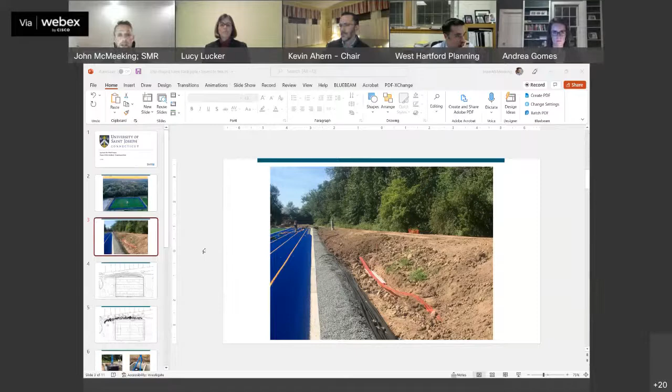In an effort to respect the surrounding natural wetland ecosystems, the university installed a StormTech filter vault system between the south side of the field and the edge of the existing woodlands to the south. The vault treats any stormwater that does not infiltrate vertically. Synthetic turf fields drain incredibly quickly, with most drainage going vertically down and very little horizontal drainage. This vault picks up any infiltration that doesn't make it through the turf, collected via pipes on either side of the field into this vault system.

Inside the vault is where it gets cool - it's filled with a series of canisters containing proprietary media targeted for specific pollutants of concern. You can pick what pollutants you're trying to target, and these canisters are filled with whatever media targets those pollutants. For this project, it was zinc and phosphorus we were looking at. The vault fills with water, which is sucked to the middle of the canister, goes through the media, and then drains through a center tube to an under-drain system, exiting the vault with pretty much clean water.

From there, the stormwater daylights into the existing wet meadow to the south of the field. If it ever reaches a certain elevation, it then drains into an overflow structure piped into the existing campus stormwater system. So there's really very little stormwater which isn't controlled as far as this field is concerned. We've got multiple layers of protection to make sure the stormwater is being handled, and most importantly, being treated properly.

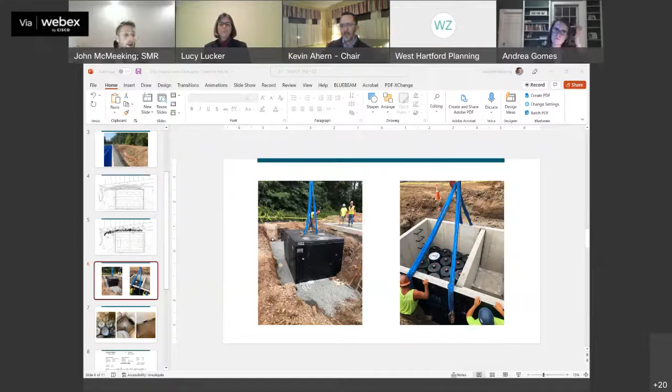At this point, we'd like to review the conditions of approval that required action by the university.

Condition number two: the stormwater filter vault shall be maintained in accordance with the manufacturer's specifications, and a cleaning and monitoring report shall be filed with the town once a year. The vault was inspected and cleaned in July of 2021 by a company called Savvy & Sons, located in Amston, Connecticut. The report is included with your package of supplemental documents. The inspection showed the vault to be clean and working as designed.

I do have a photo here, and I believe it's in your packet. You can see this is about as clean as vaults go. So again, the inspection showed it to be clean and working as designed.

Condition number three: water quality testing, including for the presence of zinc, for water exiting the stormwater filter vault, shall be done annually and submitted to the town. Water samples were collected in August 2021, again by Savvy & Sons, and sent by proper chain of custody to Phoenix Environmental Laboratories in Manchester, Connecticut. Samples were collected from the vault floor and also from the outlet pipe, so we could compare and contrast the two samples.

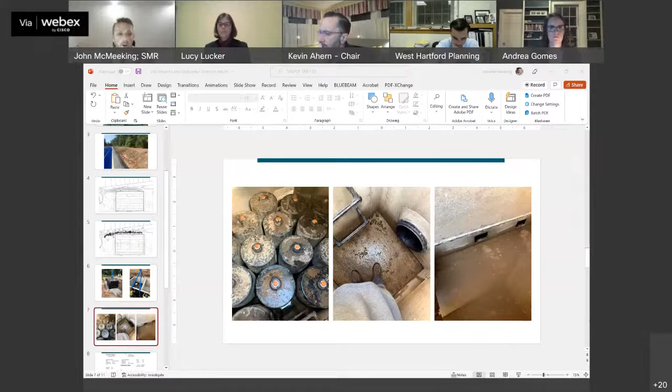As I mentioned earlier, the proprietary media within those canisters is targeted to treat zinc and phosphorus. So if we can, I'll jump here to some of this lab data and take a quick look.

Just so we're all on the same page, the EPA limit for zinc in drinking water is 5 milligrams per liter. Our test results show 0.06 milligrams per liter in the sample collected directly from the pipe, and 0.025 milligrams per liter in the sample collected from the floor of the filter itself. Given those numbers, this water is virtually free of any zinc, and depending on who you talk to, you could drink this water. It's clean.

The EPA limit for phosphorus in drinking water is 0.05 milligrams per liter. Our test results show 0.042 milligrams per liter in the pipe and 0.041 milligrams per liter in the floor of the vault. Again, this water is virtually free of any phosphorus, and it's clean. This filter vault system is doing its job very, very nicely.

As part of our discussions with the town planner in preparation for this evening, Mr. Dumais recommended that the university provide additional information on the test results for mercury. There was some language in this report referring to a percentage of mercury that was out of the acceptance range. This result was actually not from the university's water sample.

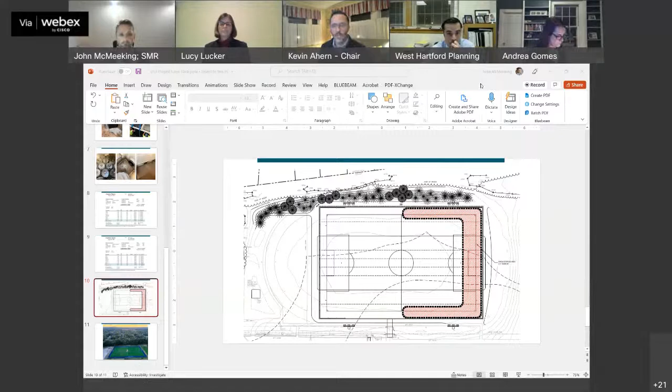This is Kevin Ahern, Chair again. Do we have questions for the applicant? I had a quick question, I'm sorry, I can't actually see Ms. Gillette on my screen, so if she has questions. I also want to note for the record that Josh Kaplan has joined us via telephone. Josh, I believe you're unmuted, so at any time if you have questions, just jump in. Ms. Gillette, did you have your hand raised?

I was just curious about the community outreach, but I'm not sure this presenter was in charge of that. I can certainly speak a little bit to that. There's been extensive outreach as we went through not only the design phase of the project, but also here in this look back phase. We actually met last week, and I think Vice President Lucker can touch a little more on this, as it's an operational component.

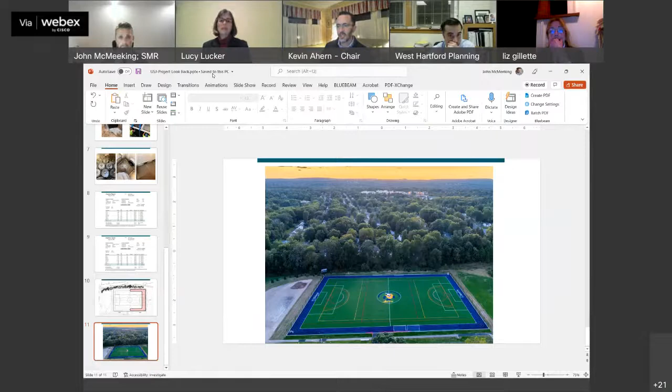Thank you, Vice President Lucker. This is Vice President Lucker. We sent out letters to all of the abutting neighbors inviting them to a meeting last Monday. We had one neighbor attend so we could answer their questions and concerns. The university is always open to feedback and wants to hear from our neighbors. We are committed to meeting all of the conditions and continuing to do so, and to try to respond to neighborhood concerns as they arise.

Ms. Gillette asked what the one neighbor who attended had to say, and whether there had been any other feedback in the year or so the field has been in use, noting that the university has been diligent in wanting to have a response. The chair noted the question was a little spotty but they got the gist of it, and asked the Vice President to take a crack at it.

Yes, thank you, this again is Vice President Lucker. The neighbor who attended acknowledged there was no spillover of light into their yard, but did want us to understand that the field is very lit, and when they look at the field, it's very light, which is a true statement. They were also concerned that sometimes there is some noise on Saturday that was a little more than they expected, but they said it wasn't a major concern.

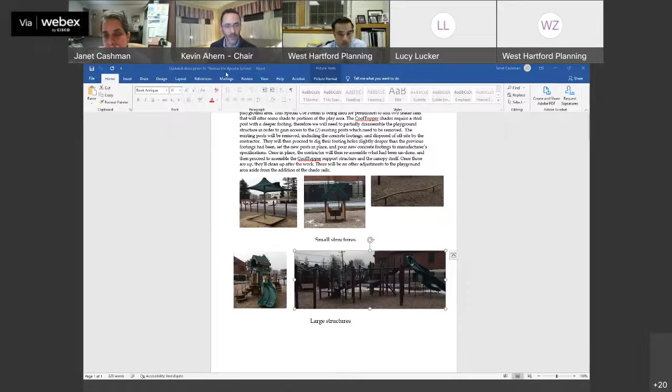Thank you, Ms. Cashman. I just wanted to clarify, you're all finished? I think so, yes. Okay, all right, so do we have any questions for Ms. Cashman?

Well, I'm sorry, excuse me, Janet Cashman again. I did get a notice later in the day today about a neighbor that had some questions and concerns about weather-related problems with this type of system. I did reach out to both the contractor and the playground company to find answers to those questions.

The neighbor's concern had to do with: since the trees had fallen, why wouldn't we be nervous that any of these things we're putting up could also be dangerous, as far as the windstorms we've been seeing and the snow. The company is M.E. O'Brien and Sons.

The consultant told us that the CoolToppers are designed to withstand 90 mile per hour wind speeds and 5 PSF snow loads per International Building Code. He said that they're installed quite deep into the ground and integrated into the structure, so they're not going anywhere. He said the hardware is stainless steel and comes with thread lock, and that they would need power tools to remove the hardware, and that no wind speeds would be able to loosen it.

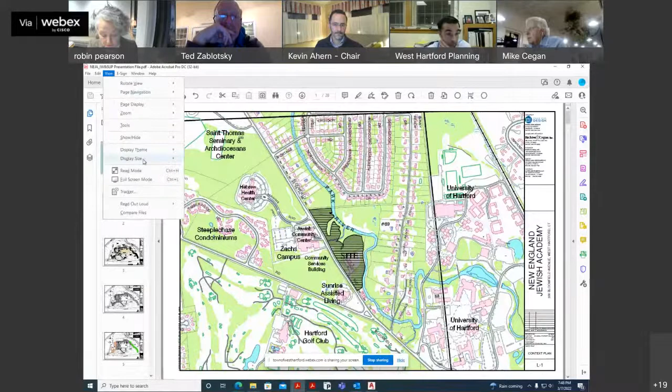The Jewish Academy's 11.9 acre site is located at 300 Bloomfield Avenue. This context map shows the surrounding neighborhood context. Along Bloomfield Avenue are other institutional uses, including Sunrise Assisted Living and the Zachs campus, which includes both a community center and a health center. The surrounding residential neighborhoods are to the north, south, and east of the parcel and are buffered by a heavily wooded area and the Park River between the school and many of the residences.

I've been fortunate over the years to be involved with the project. I'm very familiar with both the site and surrounding neighborhood, having worked on the 2009 design and town approvals, including what I think was a successful community outreach process that included both neighborhood and community meetings. That neighborhood outreach has continued through this current application and has resulted in the addition of extensive buffer plantings, which I'll go through in more detail later.

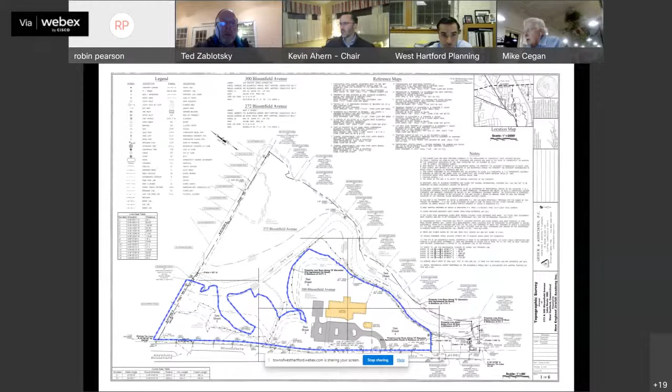This is the survey of the property, simply from 30,000 feet, showing the existing school parking and site improvements that were constructed in 2010. Most of the construction on the site is in that southern portion, or right side. North is diagonally to the left, roughly to the left on all the drawings you're going to be seeing. That southern portion is really what we're going to focus on in the next slide, and you'll see the development is as close up to Bloomfield Avenue as can be.

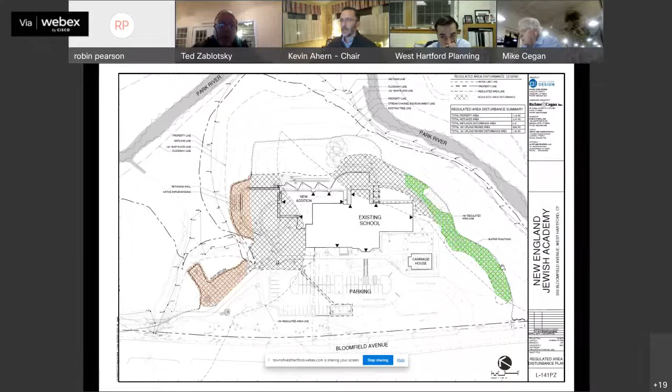First, the landscaping around the new addition, play area, and outdoor classrooms, which consists of additional trees, shrubs, and ground cover. The second component is the native plantings and native seed mixes on the slope and along the woods edge.

This is north of the play area and in and around the new stormwater basin and along the woods edge in this area as well. The third area of landscape planting is the extensive buffer plantings that were added along the woods edge south of the existing building, extending almost to Bloomfield Avenue. These were a result of the neighborhood outreach effort.

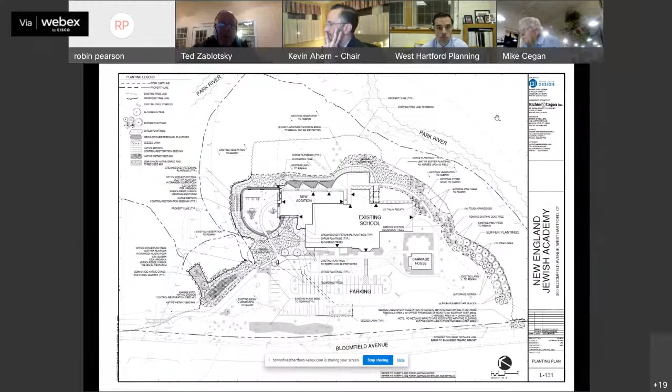Our neighborhood outreach effort involved notifying the property owners within a 200-foot radius. The effort included sending a packet of information describing the proposed changes and an invitation to a virtual meeting to discuss the proposed changes.

As a result of that meeting, there was only concern expressed by a few neighbors along the north side of Sunny Reach, where their backyards actually face directly into the site through the woods towards the building's south elevation. We met each one of these neighbors in their backyards to see their views into the site and document and photograph the conditions there.

Based on these site visits and our discussion with the neighbors, we prepared a detailed plan and reviewed the plantings with the neighbors in a follow-up virtual meeting. We also had some miscellaneous additional correspondence with the neighbors, answering their questions.

As it turns out, the concerns relate not to the proposed addition as part of this application, which we intentionally located to the north side of the building and away from the Sunny Reach neighborhood, but to the impact of the construction of the school back in 2010. Regardless of what the concerns related to, the Academy wanted to respond and be good neighbors, and so we have.

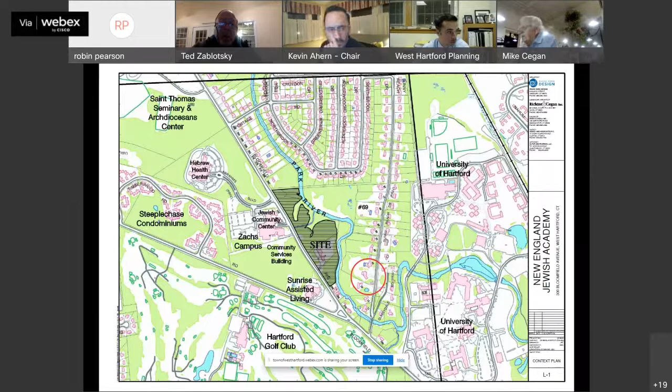Next, please. So after meeting on each of the properties and then back at the school site, it was agreed to locate the buffer plantings along this woods edge at the south of the school, extending almost to Bloomfield Avenue. This would screen the views of the south side of the building facing the homes closest on Sunny Reach, as well as screening the traffic they have glimpses of along Bloomfield Avenue.

You'll see the location of the new addition was again intentionally placed to the north side of the existing building shown here, away from that Sunny Reach neighborhood, which are our closest neighbors.

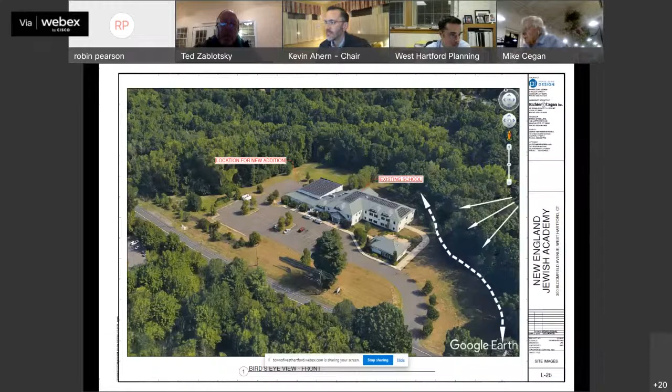Next, please. This enlargement of the proposed buffer plantings was reviewed with the neighbors. It's exactly what was submitted as part of the plan to the town. We literally reviewed each type of plant and their location, as well as the planting schedule that specifies the size at the time of installation.

So we really went through this in detail. They also wanted to see photographs and understand what the mature sizes of the plants would be.

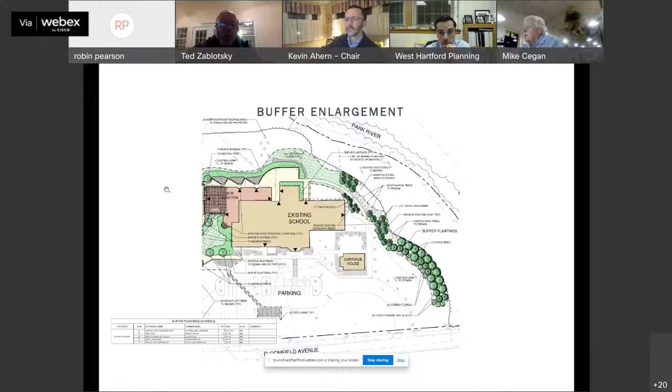So we went through all this and they were pleased at the scale and size of the materials at maturity. We also made a commitment that the buffer would be installed at the earliest planting season that is feasible, depending on when construction mobilization occurs and plant availability. This could be as early as late summer, early fall of this year. So we intend to work that out as quickly as possible on the site.

Next, please, Josh. So that concludes the overview of the site design. I'd be happy to answer any questions at the conclusion of the presentation. And I want to turn it over to Keith, who will discuss stormwater management and utilities.

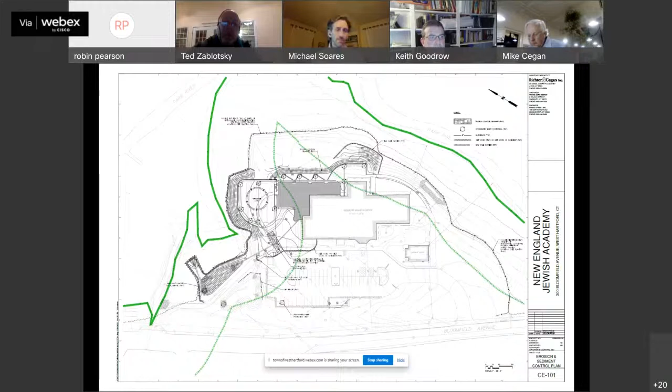The overall system here is a forest, either sort of a red maple swamp forest or more uplands as we get up these banks. As we move farther down the Park River, it gets quite steep. To the east of where the project will be conducted and north of it, it's flatter, but it's well-vegetated, very established, and diverse in its structure.

And I say that because plant communities that are diverse in structure and well-established have a buffering capacity to handle impacts. I don't necessarily mean the impacts of the project. I just mean it's a stable system that will be able to thrive and survive there for quite some time.

Part of my assessment of the wetland delineation when I verified it back in August was also a functions and values assessment. In my report, I identified two primary functions of the wetlands, which were groundwater recharge and flood flow alteration, which are the main functions that floodplain systems provide.

I also identified, or the assessment process that we use also identified, secondary functions and values, those being sediment, nutrient, and toxicant removal, and production export, which is the ability of a wetland to create food sources that can then be exported to other habitat areas.

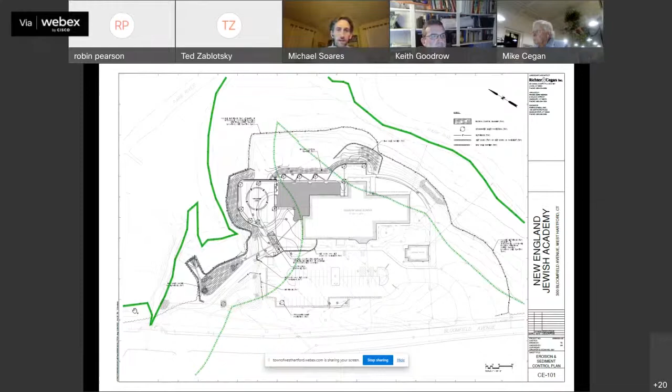Good evening, I'm Mark Vertucci, Senior Transportation Engineer at Fuss & O'Neill in Manchester. I'm a registered professional engineer in Connecticut and a professional traffic operations engineer. We prepared a traffic impact study dated December 2021 and a response to traffic comments letter dated March 1st. I'll briefly describe our findings this evening.

To orient you to the site: it's located on Bloomfield Avenue, a state road, on the east side, Route 189. The existing site driveway, which will remain in its current configuration, is located about 750 feet northwest of the intersection with Route 185, Simsbury Road, which is a signalized intersection.

As part of our traffic study, we conducted turning movement counts during the morning and afternoon school peak hours back in October 2019. We counted the site driveway intersection as well as the intersection of Route 189 at 185. The counts indicated school peak hours were 7:30 to 8:30 in the morning and 2:15 to 3:15 in the afternoon. These were the hours we analyzed.

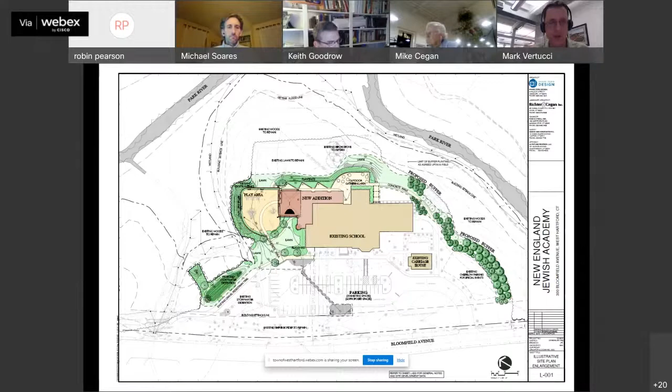not have a significant impact to traffic operations on the adjacent road network. And again, that assumes the clearing and trimming of vegetation just to the south of the site driveway. And with that, I guess we'll turn it over for a presentation on the architecture.

Good evening, everyone. My name is Adam Palmer, project manager and registered architect with Phase Zero Design out of Simsbury. As everyone has already alluded to, the proposed addition for this building was to accommodate the consolidation of the 2 schools in Bloomfield and West Hartford so that all students can now exist under one roof.

In analyzing the requirements for additional space, it was determined the best approach for the addition was to provide new classrooms for grades pre-kindergarten through 2. The new construction of these classrooms was more advantageous rather than trying to renovate existing space in the school, given the requirements for countertop height for plumbing fixtures to accommodate students of that age. It was deemed a better approach to build all of that brand new rather than renovate existing space and still require a building addition, new construction for other grades.

So the approach that we took was to extend the building to the north/northeast, connecting off of the student commons as a common point for all students, congregating throughout the day for food preparation, and then also being adjacent to the gymnasium. Locating the addition where we did, it kind of provides a separate entity, the safe haven for the littler kids, for ages 2 up through grade 2.

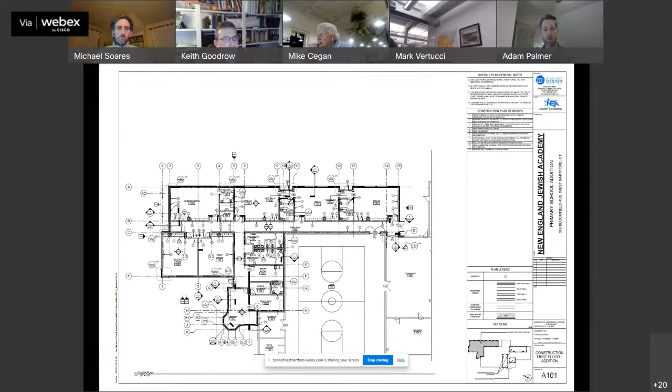There are some renovations on the interior of the building. We are making some minor modifications to the existing main office area to accommodate the additional staff moving into the building. We will be redemising some of the existing office space, so the entire footprint of that main office stays the same, but providing some additional walls and doors inside the suite.

We will be providing a new nurse suite. There's currently a nurse in the main office space. We'll be providing a new suite across the hall, so it's centrally located and adjacent to the main entrance to the building. One of the comments from the health department was to provide a room for cots as part of that suite, so we have accommodated that in our revised plan, which we're showing tonight.

So from the nurse's office, there will be a door to an adjacent room with 4 cots with cubicle curtains on the ceiling and individual lighting with lighting dimmability for the students when they are laying on the cots.

Other renovations in the existing building: we will be redemising the existing library to provide one additional classroom for one of the upper grades, and then providing a conference room and AV and storage space off of the library.

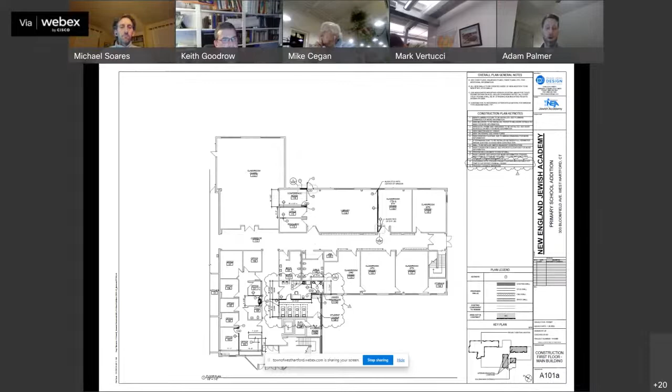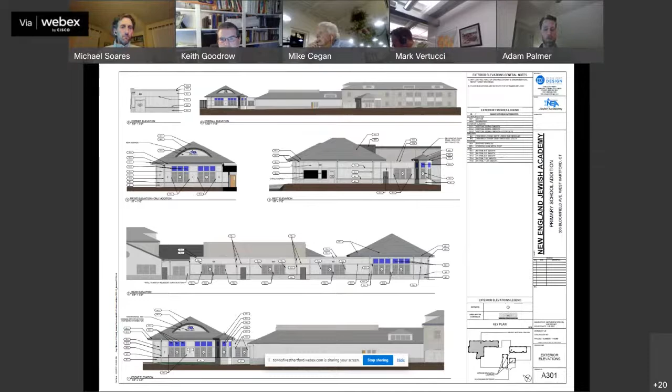So here is going back to the overall site plan. We're showing in the lighter pink terracotta color the building addition where there's a flat roof. To the right or to the left of that is the gable roof. Again, we've tucked it away from the road so there's fewer distractions. It's a safer environment for the children ages 2 to grade 2, and they're directly adjacent to our new play area.

As we've talked about through all of this, with being in the uplands review area, but outside of the wetlands themselves, it just so happened that the program and the site worked out perfectly to build the addition where we put it and have direct access to the play area. Sometimes these things just fall into place. Other times architects bang their heads against the wall and have a lot of tough conversations with the civil engineer and the landscape architect as to how are we going to make this work. This one, thankfully, everything just kind of fell into place.

And with that, I will turn it back over to Ted and or Robin if there are any other closing comments we want to make.

Thank you, Adam. Yes, I should just make a couple of findings with regard to both the wetland review and the special permit findings that you have to consider in deciding the applications before we turn it over to you and to the public. With regard to wetlands, again, there are no direct wetland impacts. The environmental impact of the proposed regulated activity on wetlands or watercourses will not be so significant as to warrant the denial of this application.

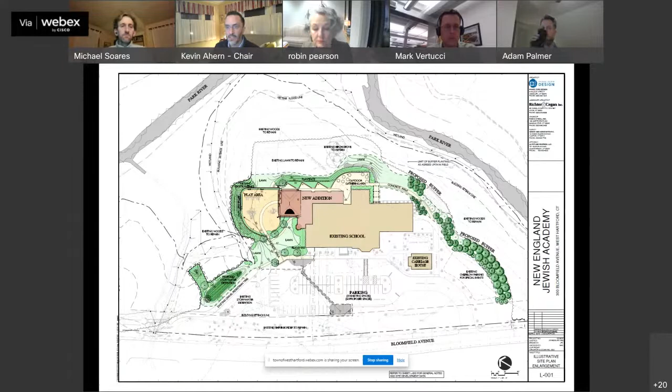I have a couple of questions which are more informational for me. With the buffer planting schedule on L304, you indicate that you have included 16 eastern hemlocks with the presence of woolly adelgid. Why are these included?

We are using hemlocks now where there's access and they can be monitored. There's no other plant that does as a native evergreen and produces the way they do. They're specifically located adjacent to the canopy, and the pines that were planted there initially, the neighbors were not happy with because they just don't thrive like the hemlocks do in those conditions. So we're using hemlocks on schools, and clients have got to be aware they need an IPM program to monitor those. Frankly, we haven't had any issues really in the last 10 years of woolly adelgid.

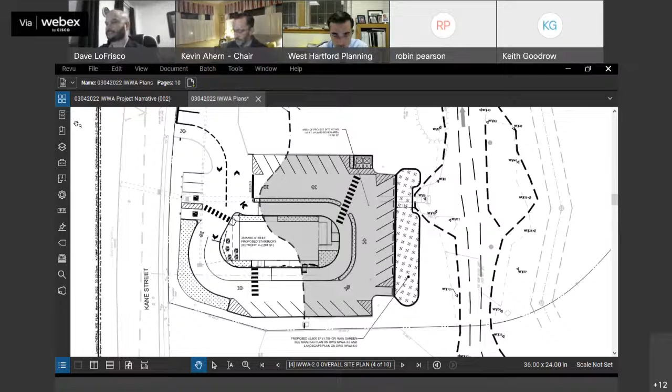In response to the Commission and staff's request, we are proposing drainage and treatment improvements to the site. Stormwater runoff from 17,000 square feet of the proposed parking area will now sheet flow to a proposed rain garden instead of being collected at the southernmost basin and point discharged through an 18-inch pipe with flared ends direct to the wetland without treatment or flow reduction. Three existing inlets at the north of the site will remain, be maintained, and drain to the existing 60-inch town drain easement.

The proposed rain garden is 2,500 square feet and provides 1,700 cubic feet of storage. A 12 by 12 gabion wall with wire mesh and riprap gravel will surround the rain garden so that the edges stay intact. A flush curb will be installed at the back end of the parking area to allow sheet flow to drain off site into the rain garden. The rain garden and buffer area will be planted with native wetland plantings, which will function both within the rain garden and to implement vegetation in the buffer area.

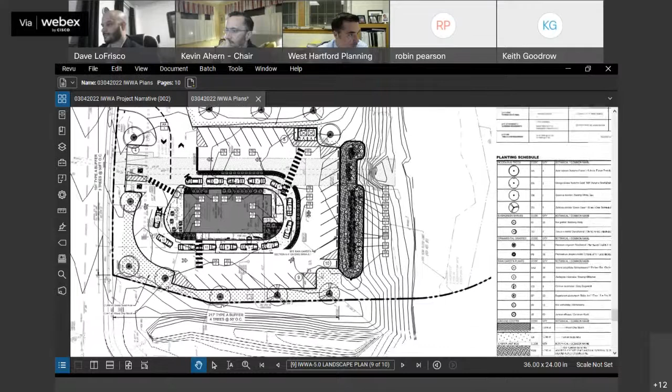Thanks again for your time this evening in hearing this proposal. At this time, I'd also like to pass over to Martin Brogy so he can speak a little bit more on the revitalization efforts that are also ongoing at this site.

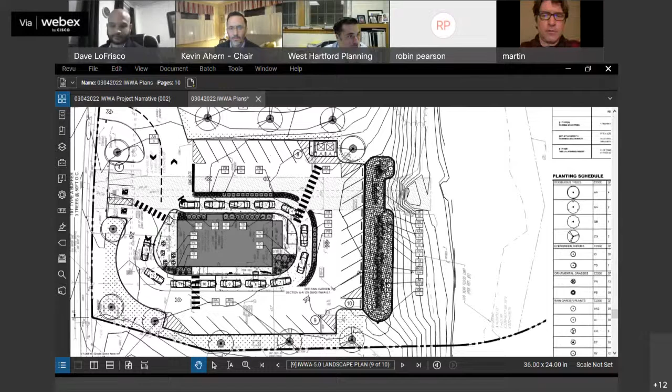Thank you, Mr. Brogy. You can just relinquish the screen. I still see the map up. I don't really need the map. Sure, thank you. There we go, thank you, sir.

Good evening everyone, nice to see you again, and thank you, Dave, for that presentation. It's been nice to work with Kimley Horn out of Manhattan on this project. They're really creative and sort of out of the box thinkers, and sort of artistic with their design.

The variety of herbaceous plants and woody vegetation that they proposed in the rain garden and around the site is really awesome, and it was really fun to go through. Even the seed mix that they chose for the rain garden - I really get into seed mixes myself, and it has a wide variety of flowering plants and things that the bees would really enjoy, and shrubs that are also berry producing and flowering. Very wildlife friendly, and with enough variety such that ultimately it will be self-selected for the drought tolerance of that basin, which, as we know, will be somewhat seasonal.

And just the robust planting scheme is really awesome. You can just take a look at the number of plants that they're suggesting, the size of that rain garden, and then all the landscaping around the building and through the drive-through and the outdoor seating. It's going to be a beautiful, beautiful development.

And it's nice that that rain garden is along Cane Brook, intercepting all that surface water flow, capturing the initial flush, treating it, and then slowly discharging it over those gabion walls as a level spreader across - I think it's about 160, 180 feet across the back of that site. It's just a really nice design, really low impact green infrastructure design versus that one catch basin that just grabs everything from the back of the site and dumps it into the brook. So I really liked it, and it dovetails nicely with the existing restoration plan that's been ongoing pretty intensely for almost a year now.